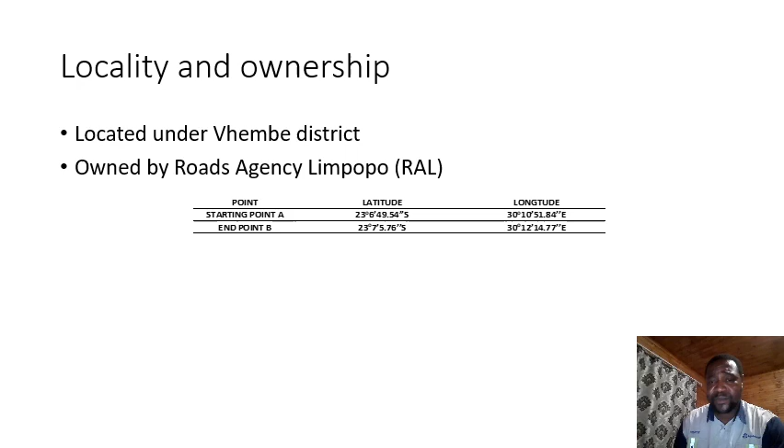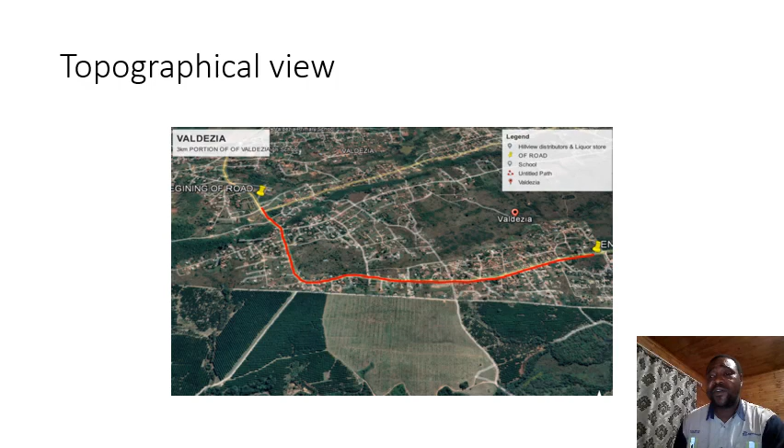The locality and ownership of the road. The road is located under Vhembe Municipality District and is owned by Roads Agency Limpopo, RAL. The starting and end points of the road are shown here and are also indicated in my project. This is the aerial view or topographic view of the road that we're going to be designing. That's where it's lying basically. So this road is more of like a rural type of road, the original road that is connecting this community to their respective township.

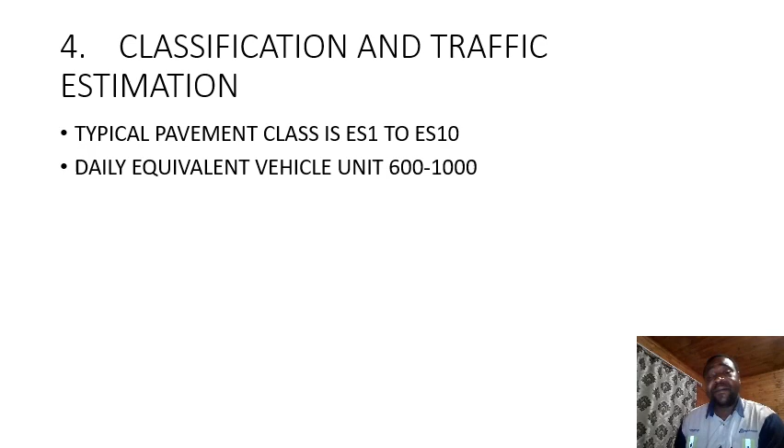The classification and traffic estimation. The traffic is estimated to be in class ES1 to ES10. The daily equivalent vehicle unit is actually 600 to 10,000 that we expect. This 1,000 is a mistake, but basically it's up to 10,000.

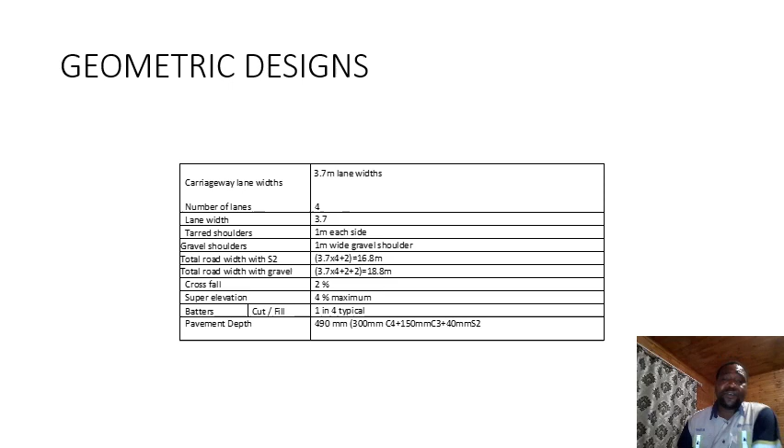So basically, on the horizontal alignment, we're checking the information that we were given by AutoCAD Civil 3D when we designed the road. For horizontal alignment, we got the beginning of a curve at 0.293, so 293.86 meters. The coordinate values are these ones. Then the end of the curve was at 415. The coordinates are also respectively these ones.

So we carried out the join to check the total straight line that connects these 2 points. And we also checked these points with regard to the AutoCAD. On the AutoCAD, we got it as 120.45. Then on the join when we carried it, 120.31, which is almost equal.

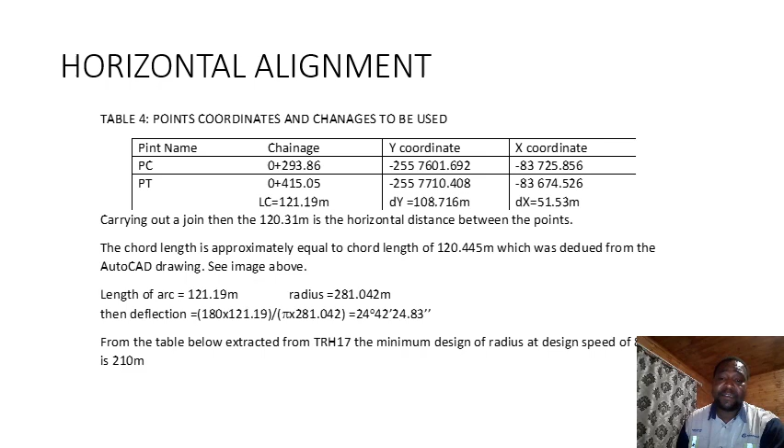Then the length of arc, when we measured it, since we put a circle on the AutoCAD to check the radius of the circle that describes this horizontal curve, we got the radius as 281.042, and the deflection angle as 24 degrees 42 minutes 24.83 seconds. However, this 281 is actually okay, since TRH 17 stipulates that for a horizontal curve you need about 210 meters with a design speed of 80 kilometers per hour.

Then we also check the vertical alignment. On vertical alignment, we did the calculations, but for this presentation, we focus on TRH17 to check if the vertical alignment is okay. So the stopping sight distance at 80 kilometers is basically given as approximately 140 on TRH17.

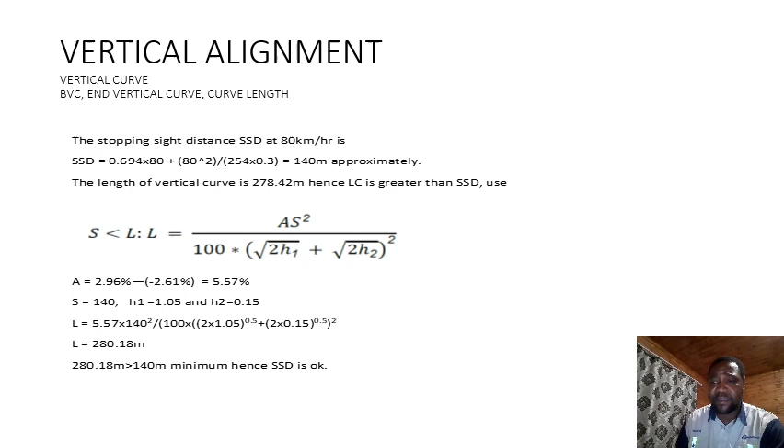When we checked that the stopping sight distance is less than the curve length that we have, we used this formula to check if this curve is okay. So the actual curve sight distance that we got was 280.18, which is bigger than 140, which means it's okay.

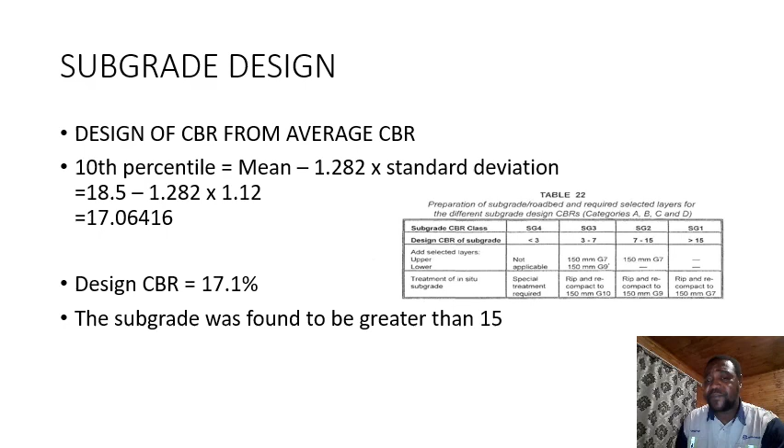Then on subgrade design, we were given the average CBR percentage, California bearing ratio, which was 18.5. With this one, we deduced the design CBR, which we got as 17.1%. So we checked that this road actually falls under SG1 because it's greater than 15, so the road only needs to be ripped and recompacted to 150 millimeter G7 for the subgrade.

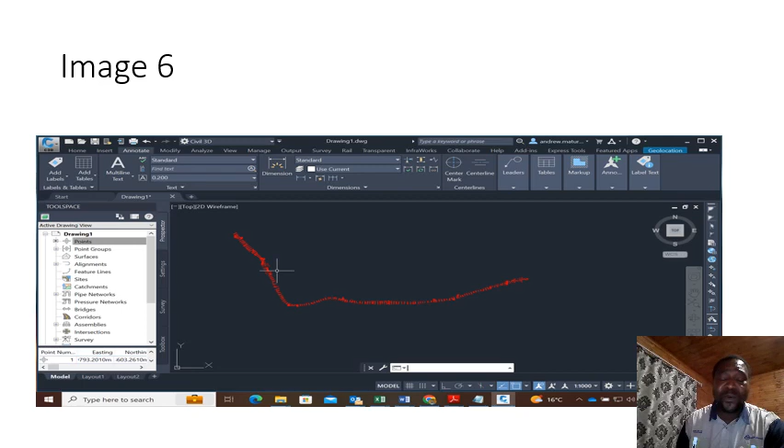But to visualize this road now, you need to click the zoom function in AutoCAD. So if you check this alignment, the alignment we got and the alignment shown on our topographical survey are identical. Now we started doing the AutoCAD design by putting in lines. We start with lines, then after that we add curves.

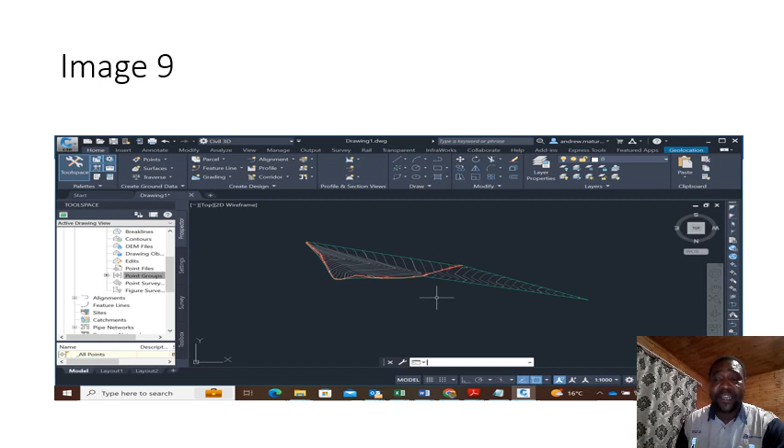After that, we created a surface, surface EG, by adding all these points. When we added the points, AutoCAD Civil 3D created this surface. This surface shows contour lines within the area that we were given by the surveyor. Then from there, we created a horizontal alignment, which was called AB. This is now the horizontal alignment. If you check my PDF drawings, you can clearly see it.

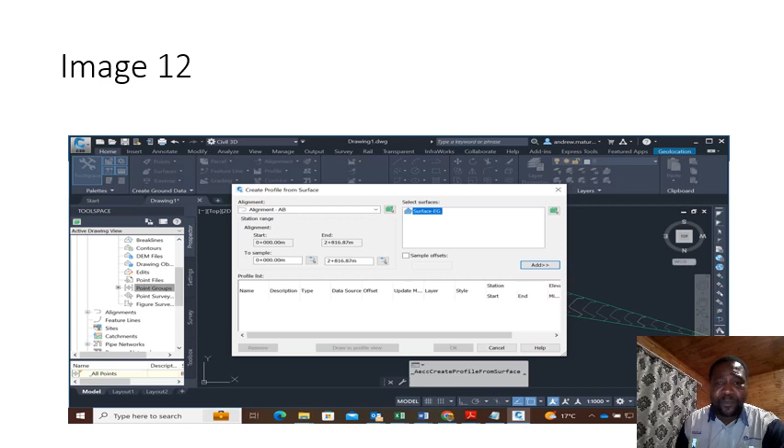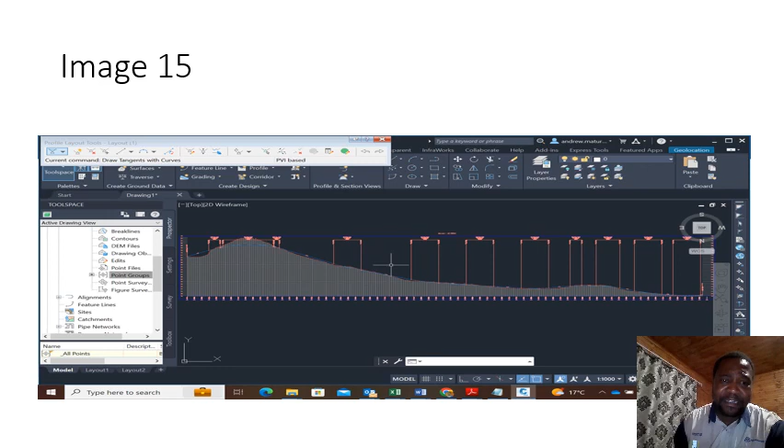Then we're creating the surface profile, which is like profiling the land. We need the cross-sectional view of the existing land. So this is how we got it, and this is the generation of it, the cross-sectional view of the land. After that, we started adding the profile where we want our road to be. The road is the blue one, following the ground level that we were given.

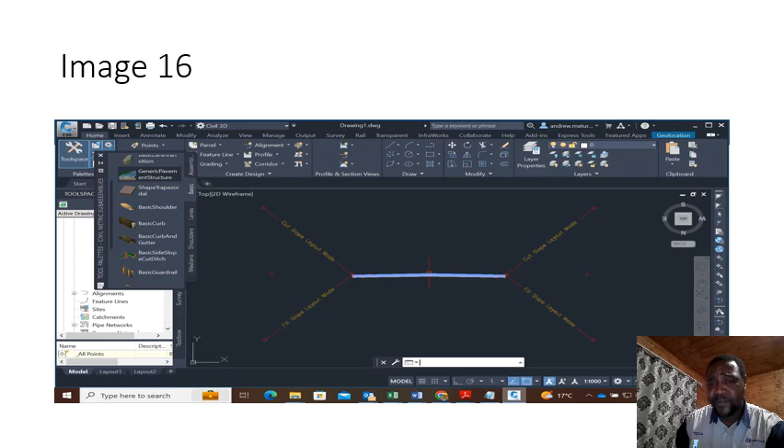Then to generate the corridor, you need to do an assembly. This assembly has a thickness of 490 millimeters, and it has side slopes for V drains of 1 in 4. After running our assembly, we generated our corridor, which is the road alignment. With that, we can easily generate all the quantities we need, like the cut and fill and the mass haul diagrams, which are illustrated in my annexures on the drawing.

Now, on the proposed drainage system, this road has V drains running on the sides. For those V drains, we checked sections which have two highest points. Within an area that has two highest points, we must have a lowest point. At those lowest points, that's where we inserted our culverts.

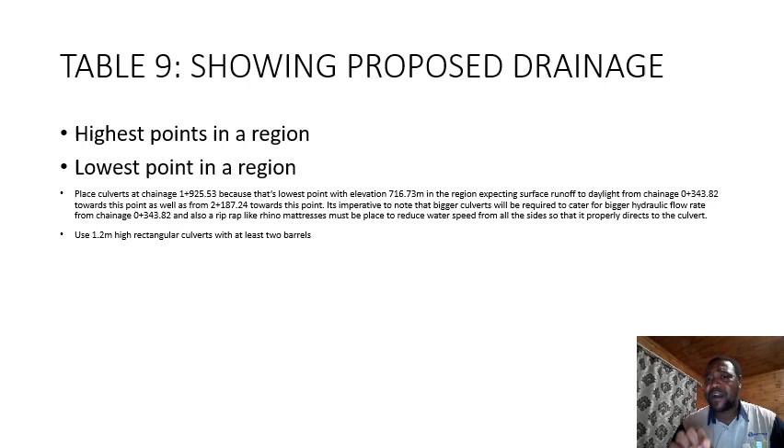The V drain will work by collecting water from the main road through surface runoff, which will be collected by the V drain. Then it will be channeled to the lowest point, which is where we inserted our culverts.